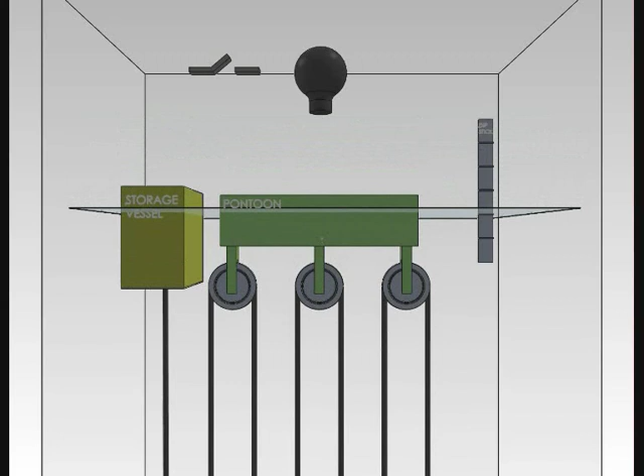Part 2, System Operation Schematic. System Operation Schematic is the second in a series of videos which are intended to explain why the buoyancy engine could be useful, how it works and why it makes good business sense. These include an introduction to tidal power, a scaled application, an illustrated business case, construction challenges and frequently asked questions.

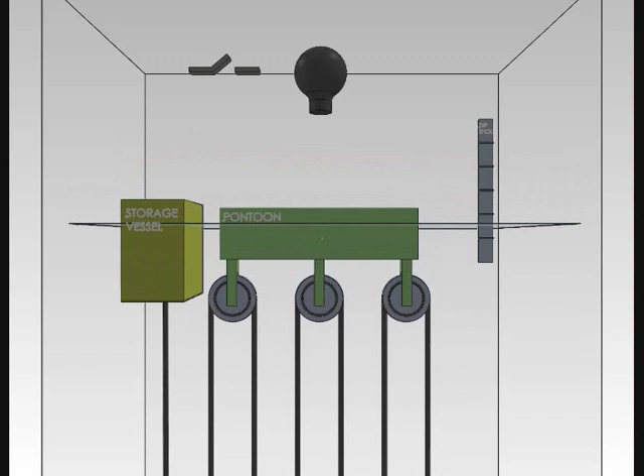Here, the storage vessel incorporates a matched turbine and generator set which are rated to suit the working head of water during the generation phase of the operation cycle. The dipstick shows a tidal range of 2 meters with half-meter graduations.

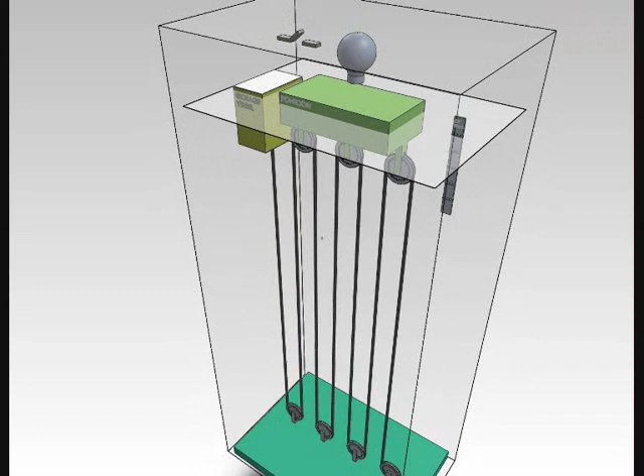The ratchet pulley system connects the storage vessel to the pontoon, and for this example a 6:1 gearing ratio is shown. In simple terms, the storage vessel will descend by 2 meters, the tidal range, multiplied by the gearing ratio, in this case 6, to give 12 meters descent travel, each time the water level rises from low to high tide.

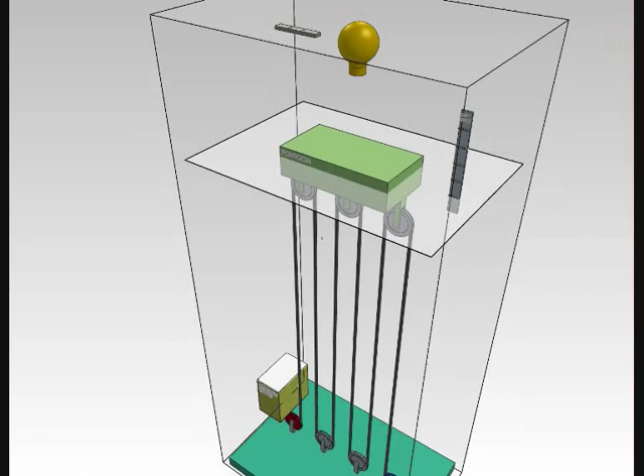For demonstration purposes, I've only shown a single pulley system, but in practice there will be several compound pulleys, each operating together, as shown in the scaled application video. When the pulley is coloured red, it is fixed. When blue, the pulley is driven by a motor to take up cable slack, and if grey, the pulley is free to rotate.

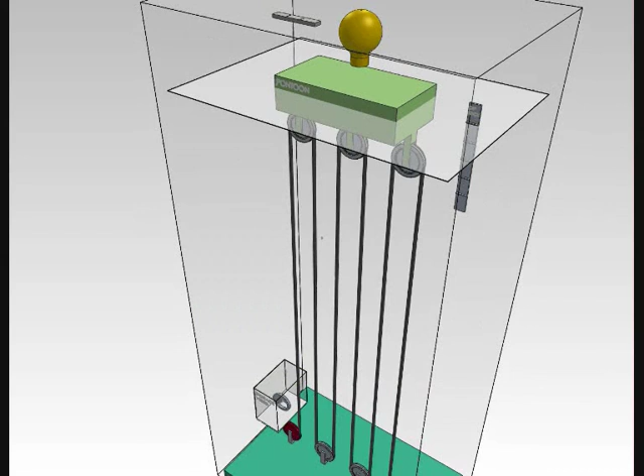The optimum business case is achieved by selecting a deep water location with a good tidal range and selecting a pulley gearing ratio to complete a full operating cycle with each tidal cycle. The UK is ideally located on a continental shelf which provides adequate ocean depth and good tidal range within easy reach of the coastline for cost-effective connectivity to the national grid.

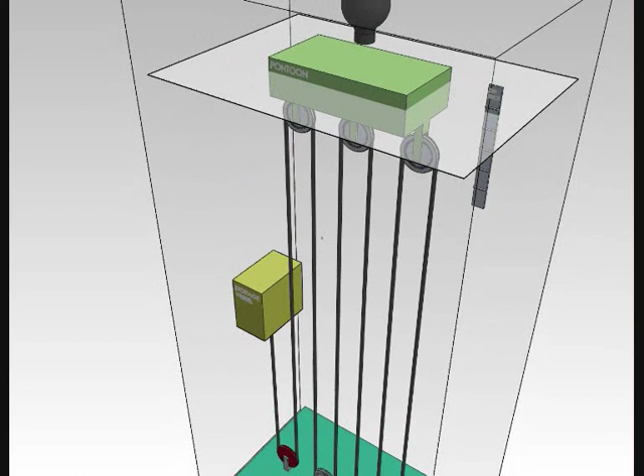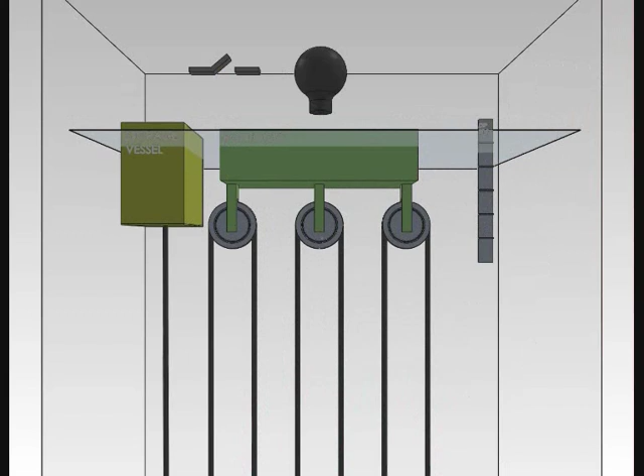To contrast against an ideal arrangement, this schematic animation depicts 3 12-hour tidal cycles for one complete operation cycle, including 6-hour descents and a 6-hour generation phase. The rest of the time is taken up waiting for low tide and a purge phase to empty the storage vessel. This would give 2 generation phases every 3 days or 6 tidal cycles, and could be used singularly to top up the national grid at peak times.

Alternatively, a base load can be met continuously by adding further buoyancy engines operated in a staggered formation. Each switch represents a separate buoyancy engine, that is, when a switch is closed, one of the 6 buoyancy engines is generating power.

Power generation is achieved when valves are opened to allow a flow of water across the turbine. The turbine and the generator are linked by the same axle, so when the turbine rotor turns, so does the generator rotor to generate electricity. The greater the flow rate and working head of water, the greater the power which can be generated.

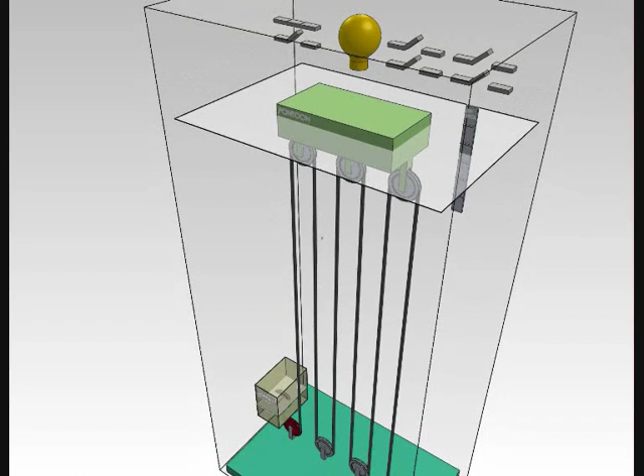There is a great improvement in controllability when compared to wind turbines that only generate power if the wind conditions meet certain criteria. Similarly, solar PV systems only generate power during the daytime, and even then there's a significant drop in performance if it's cloudy. This doesn't mean these technologies can't serve a useful function. In fact, the buoyancy engine pontoon would provide an ideal platform for offshore wind or solar PV to augment the business case.

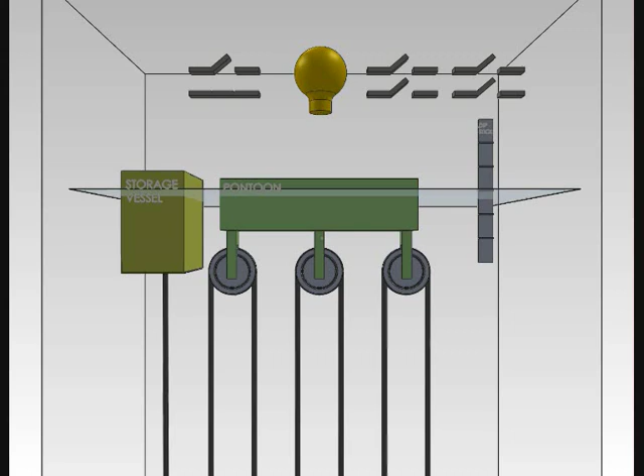The turbine outlet pressure also affects working head, and to optimize efficiency there is a vent pipe, not shown, running from the storage vessel to the surface. The vent pipe is sized to relieve the build-up of pressure that would otherwise occur within the storage vessel as it fills. Unfortunately, due to the rise in water level within the storage vessel, a small reduction in working head can't be avoided. The storage vessel is engineered to remain buoyant even when full of water.

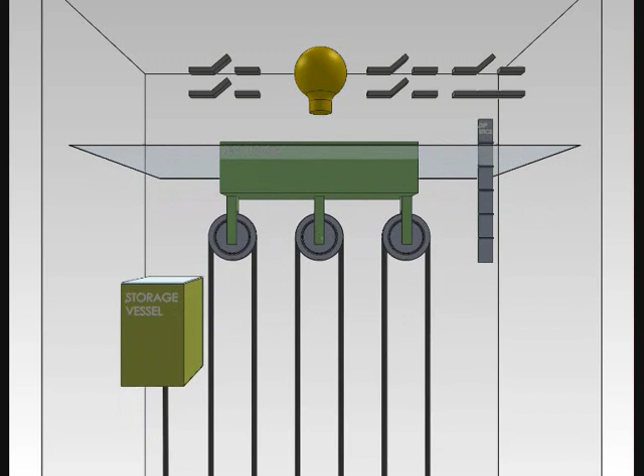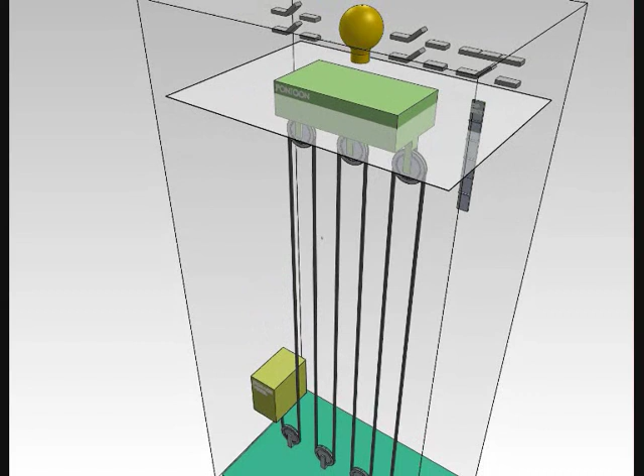Once the generation phase is complete, the storage vessel is allowed to ascend due to buoyancy. In order to avoid take-up losses or excessive drift, the storage vessel isn't allowed to break the surface, but instead is held just below, where it is then pumped out with a purge pump. Since the working head during the purge cycle is much less than that during the generating phase, much more energy is produced than is used during the operation cycle.

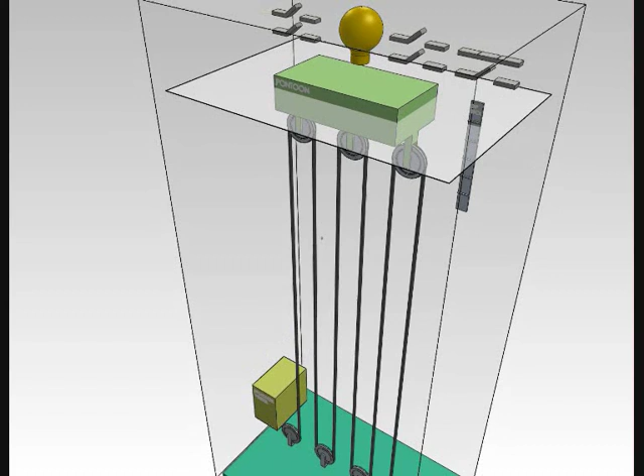The illustrated business case will run through a worked example and serves to show the importance of the feed-in tariff and renewable obligation certificate government incentive schemes which encourage investment into new renewable technologies such as this by ensuring long-term revenues. The next video in the series is a scaled application video which is based on 3 buoyancy engines,

each with a turbine and generator set rated at 2 MW. The systems are based on a 25:1 pulley ratio, 2 metre tidal range and 50 metre working head with a storage vessel capacity for a 4-hour generation phase.

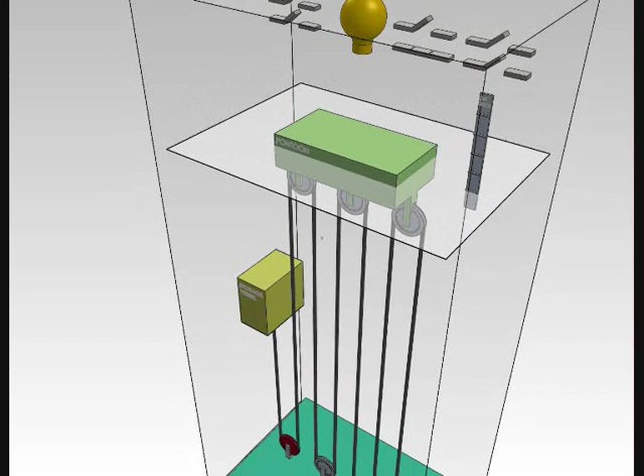For the UK there are typically 2 tidal cycles per day, so each buoyancy engine would provide 2 generation phases of 4 hours or 16 MWh of power per day. This provides 48 MWh of power in total per day, which is enough to power 5,800 smaller homes or 3,600 average sized homes.